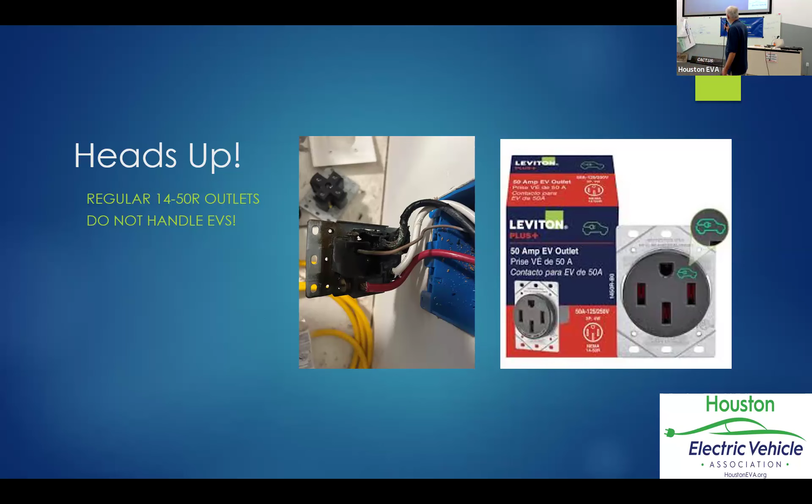Yeah, for folks with the chargers in the garage.

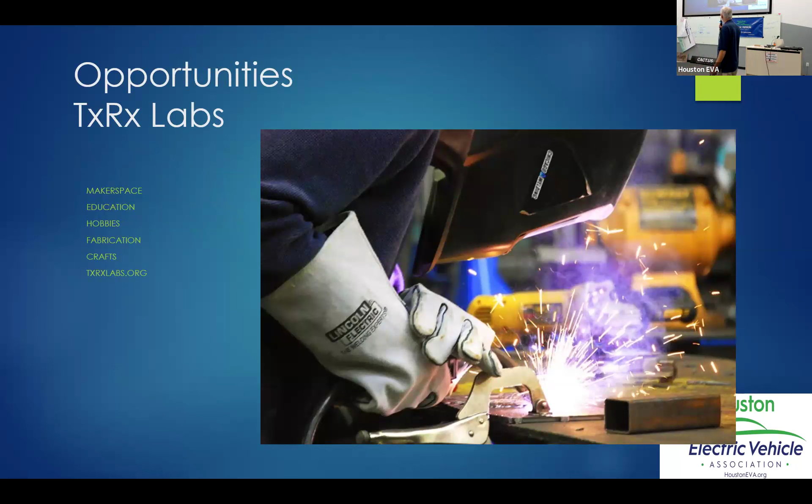TXRX opportunities here - you can always get a tour, which is really nice, to understand what's going on here in the building. We appreciate them letting us have free use of this space once a month.

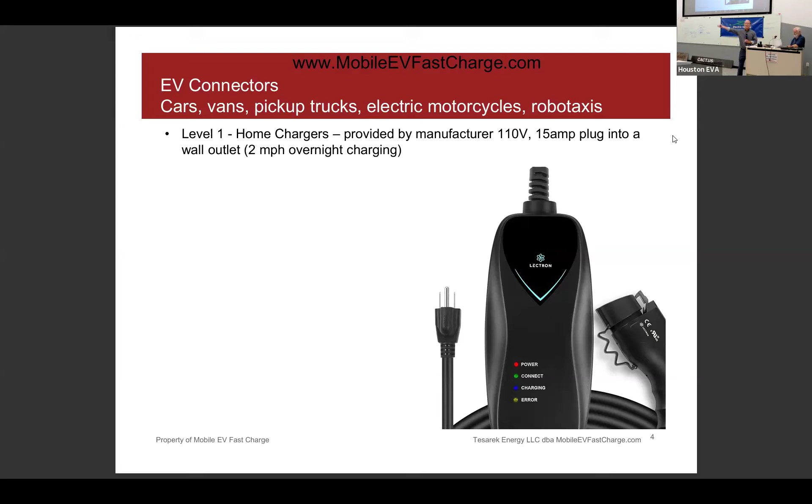What I am finding is people are renting EVs from rental companies, and they're not providing this level 1 charging. So people don't know what to do, which provides business for the company. But it's unfortunate that rental companies aren't including this in their equipment, because it could at least get you enough charge to get to a fixed charger.

The level 2 charger is generally a J1772 connection, and it looks like that - it's got 5 little dots in it. It's about 8 kilowatts, 240 volts, 30 amps, charges at about 24 to 30 miles per hour. You hear companies like Blink, ChargePoint, that provide these on a commercial basis.

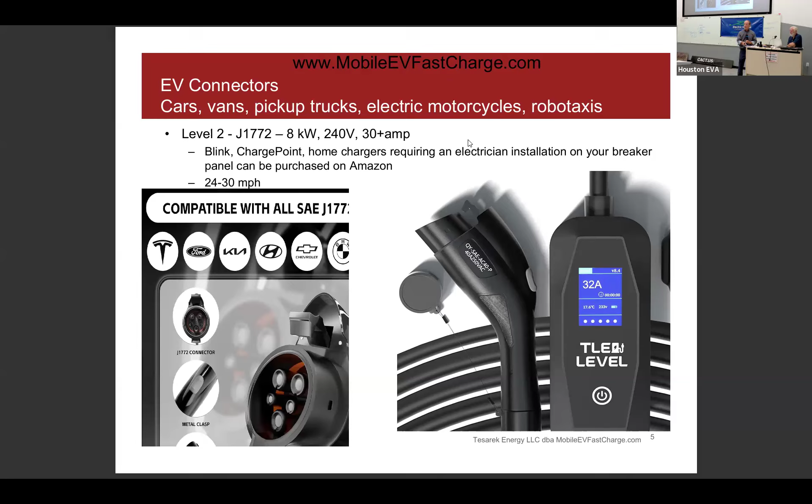And then, if you had an electrician install a 240 volt breaker, you can put a level 2 charger in your home. It does cost you, obviously, to get an electrician to come in and hook it up. But you can get level 2, and that will definitely charge your vehicle overnight if you had that capability.

Then the most interesting one for everybody is the level 3 chargers, and there's actually 3 of them. There's the CCS1 combo that refuels at 350 kilowatts, which is about 900 miles per hour, and the Tesla superchargers are about 250 kilowatts and about 750 miles per hour. But all of those statistics vary by the facility you're at - you can go to an EVgo station or a Shell recharge, and it's only charging at 80 kilowatts.

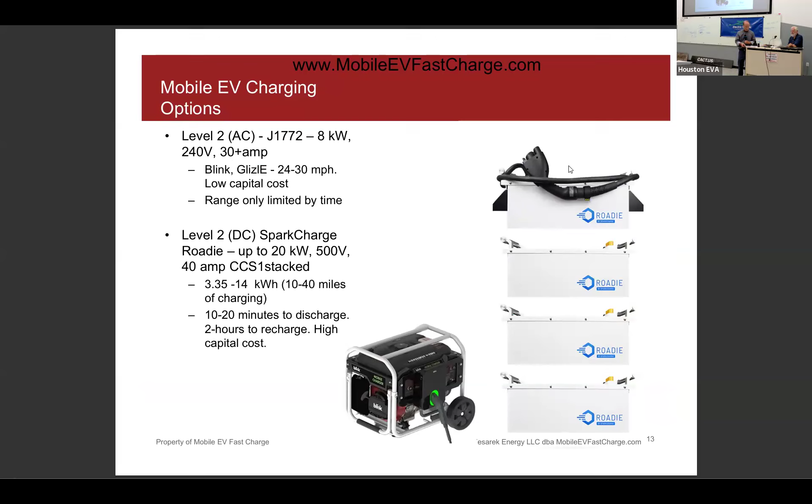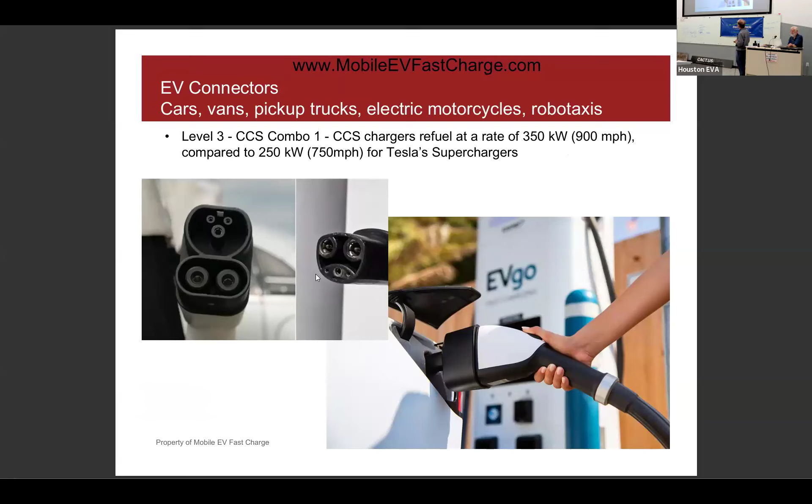Oops, wrong button. Must be the wrong button. Okay, all of those clicks just went there. Let's see if I can go backwards now. Can we go back? Can you help me on that one? They're up there at the end. Right there, go down 1. Just 1. Okay, it's not just me. Just 1 more below that one. Keep going, you're at the end. No, that's the end, that's like the second to last page. That's the last page, yeah. Keep going, up, yeah, up towards the beginning. I think you're going the wrong way, you're going towards the end. Let's go back towards the beginning. Page up. Oh, that's the page up. Wait, stop, okay, let me take it. Let me see if I can take it from there. I got it, okay, thank you.

So the next one, the level 3 that everybody hears about is the Tesla superchargers. As I said, it's 250 kilowatts, 750 miles per hour.

And until recently, Tesla was only able to use the NACS, or North American Charging Standard, plug, which is this one right here, to plug into a Tesla. And if a Tesla needed to use a J1772, they would need an adapter, and those come with the Teslas, and they plug in to a J1772.

But two things happened: Teslas allowed other makes of EVs to be able to use their Tesla network - that's relatively recent, just happened. And the other is that Teslas now can use a CCS connection - this is actually the adapter they have to use, it plugs into their car, and then they plug the CCS connection into this side. So there's now both sides of this connection for a Tesla.

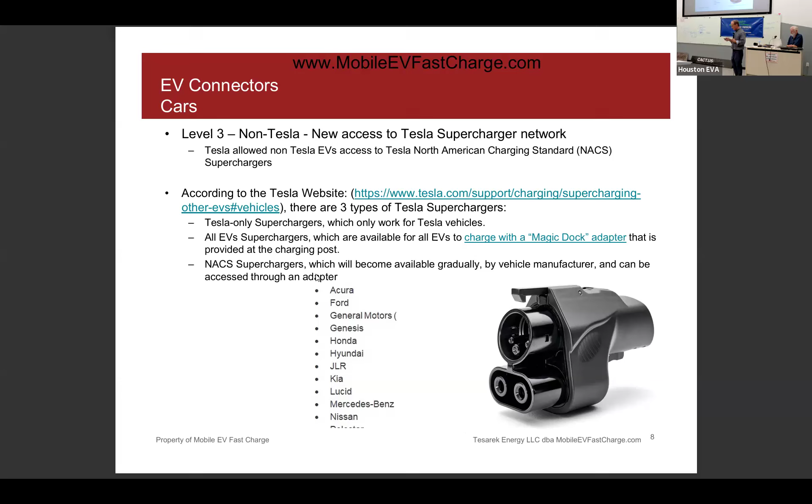Those are the connections, we can talk about that. If you have questions at the end, we can talk about how they charge. The other issue with that, did I do that?

So this will be better for all of you. You can't see me, you can just look at the slides.

So the other issue with electric vehicles, and most people don't understand, is there's actually two batteries in the car. There's the high voltage battery, and there's a 12-volt battery. Every car has a 12-volt battery, just like in your internal combustion engine, your ICE engine, they've got a 12-volt battery and it runs the onboard computer. It's needed to open the doors and the frunk, and to charge the vehicle. If the 12-volt battery isn't working, guess what? You're dead, because you can't charge the high voltage battery without the low voltage battery.

What I found is people that get to the end and they're at zero miles and they keep driving, the car actually runs on the 12-volt battery. It runs the entire electrical system to dead. And what happens then is the car's dead. You have to jump start the 12-volt battery in order to do the charging of the system.

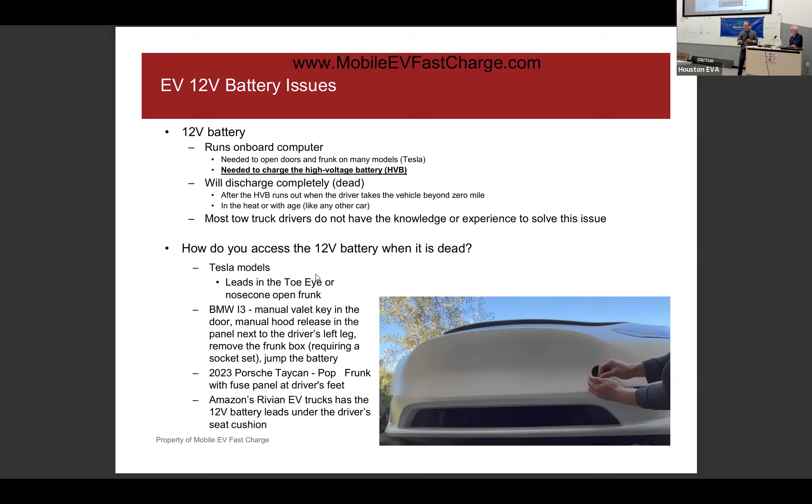My next topic is considerations when buying a used EV or renting one.

I think I mentioned this at the last meeting, that things are changing in the market. When we first started doing EVs, it was the technology, early adopters were buying EVs - people like us in the room, who like new things, can read the owner's manual, and so on. So guess what, we're 7, 8, 9, 10 years into the cycle. Your new technology isn't such new anymore.

Trade it in, right? Now, I don't know if you're aware that the EV market, the price of EVs has plummeted over the last couple of months. And so guess what, the least expensive used cars are EVs. And who buys the least expensive cars? The poorest people with the least knowledge.

Exactly, and they're coming off of lots. They're coming off of used car lots, not out of the Tesla factory or the Chevy dealership. They're coming off of Mo's used car lot, and Mo isn't going to tell anybody, he's just going to try to sell you the car and goodbye. They're not going to tell you how to use the car.

They're not going to provide the level 1 charger. A lot of times they don't charge it all the way up when they leave. I've had people that drove it off the lot and they ran out of charge on their first trip out of the lot.

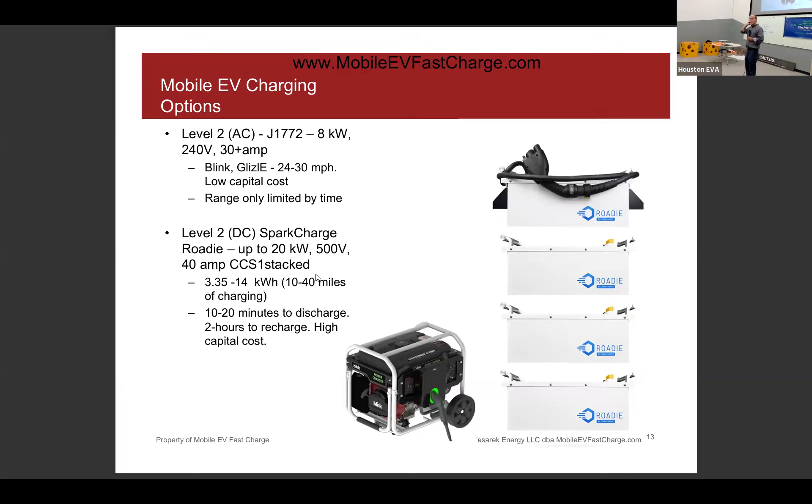So we're looking at that, but there are people using those. They're expensive now, and I don't understand how they would make money doing this. So that's why we haven't put that in the fleet yet.

And then you talk about the ask. We were talking about how long using a level 2 generator versus a true level 3 generator, where you've got lots of power and lots of time. You're talking about a trailer pulling that behind, and that trailer is probably 5,000 pounds and probably costs $100,000 to do that. So you're probably not going to see a lot of mobile level 3 chargers that can do a full Tesla supercharger-style charge — they have those for fleets. So if you had your own fleet, you could buy one of those and keep your fleet charged.

Questions? Anybody have any questions for me?

Someone asked about the 12-volt battery: have you ever replaced a lead acid battery with a lithium battery? I think most of the time they're using lithium batteries now — the Tesla one's a lithium battery. It's a form of lead acid. Yep, it's not lithium. I saw — was it a Bolt? I've seen lead batteries in there, but I don't know if you can replace a lithium battery with a lead acid one. So the data I heard from the new League City Tesla location is that yes, the newer vehicles are using lithium and they last a lot longer than lead acid. But due to the electronics of the car having been built for lead acid, you cannot take a car built for lead acid and put in lithium. And they're actually calling the lithium 16-volt batteries now.

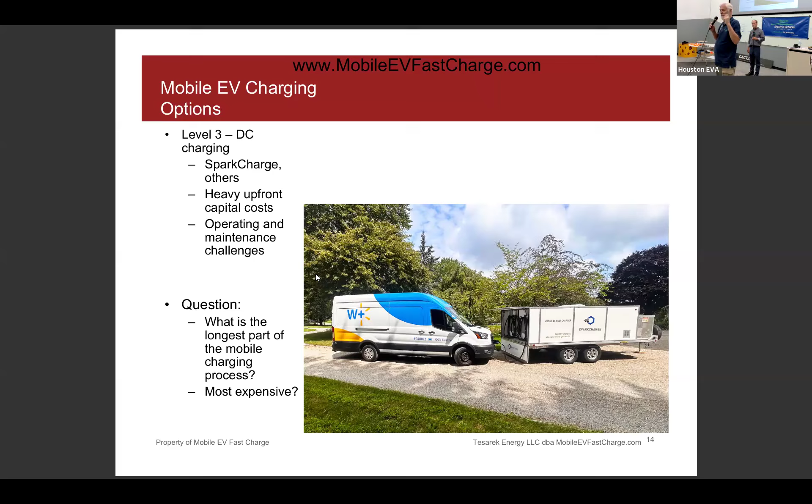The thing I have heard is folks with golf carts love putting lithium batteries in under the seat, in place of the original lead acid batteries. Because you're not generally dealing with complex electronics — most golf carts are just on and off — they zoom because you've reduced the weight of the vehicle substantially, and they go fast when you hit the accelerator in a golf cart with lithium.

Most of the roadside drivers for AAA are not employees of AAA, they're contractors. Why couldn't you make an arrangement like that, so they call on you when necessary? Good question — AAA is not providing the service currently. They made an announcement that they want 1 million EVs on the road in Texas, since it's AAA of Texas. I did the math, and it's going to be 3 or 4 years until we get that number of EVs on the road. I've tried to contact them — I think you gave me some information about a AAA person — but they're providing mobile EV charging in about 22 markets right now, nothing in Texas.

You're here — who needs AAA? Well, yeah, but it would be another source, to refer them to you.

Right, it could be, but the roadside drivers don't know how to deal with 12-volt batteries. They don't know how to deal with a lot of issues, like if your car's dead — they need the car to go in neutral to get it onto the flatbed, and they can't do it. So they just can't.

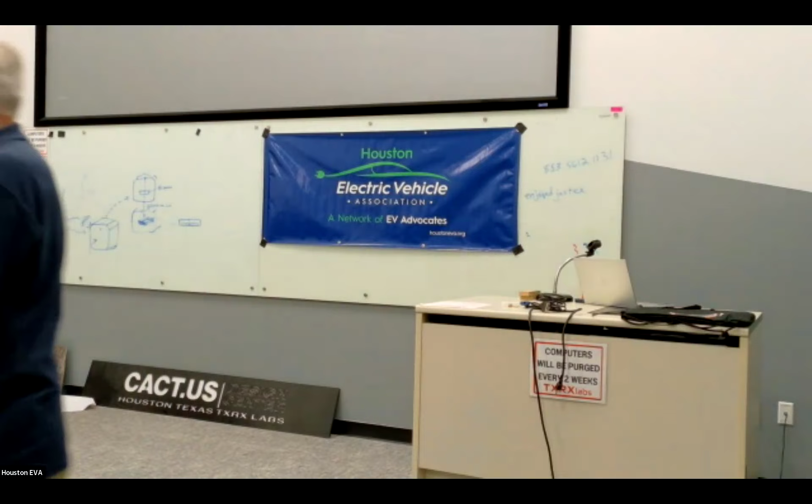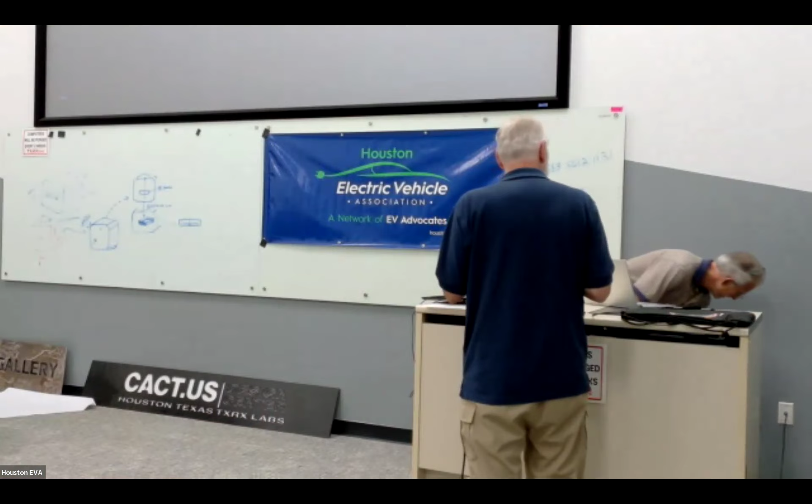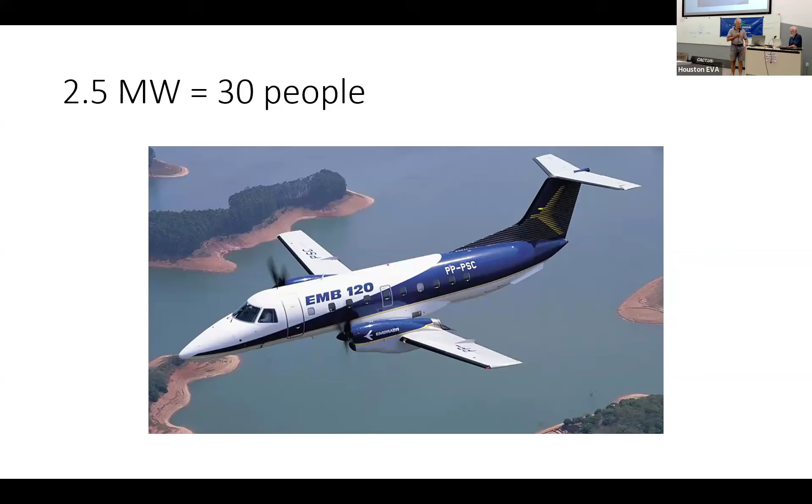It says 2 megawatts on this slide, but they're up to 2.5 megawatts, 2,500,000 watts. What does 2,500,000 watts get you? Well, if you put 2,500,000 watt gas turbine engines driving a couple of propellers behind a gearbox, you get to carry 30 people pretty fast, 300 miles an hour. This is the Embraer EMB 120. I have about 4,000 hours in that airplane. Anyways, brings me back.

All right, speed. How fast can we go? Speed is a function of engine, motor, power. You notice how I say engine and motor, because as most of you, if not all of you know, engines are internal combustion machines and motors are electric machines.

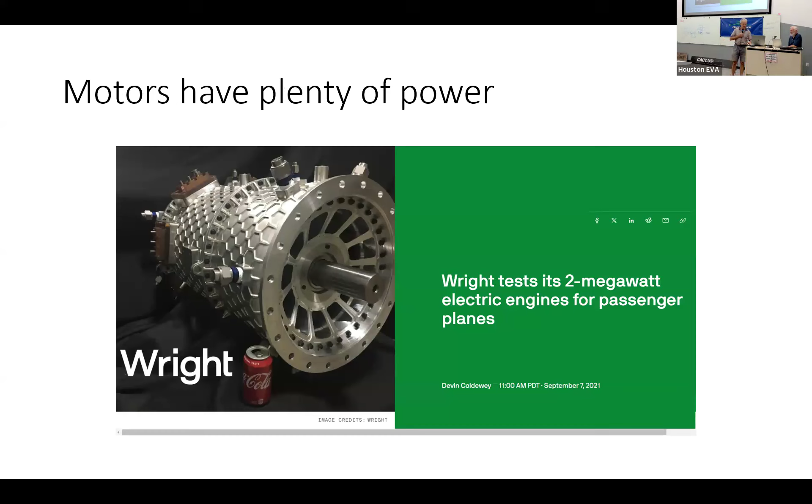Although, look at these people. I was at Oshkosh at the electric aircraft innovation symposium, and they're calling them electric engines. Why? Because I think all the marketing folks are thinking it's going to be easier to sell people on an electric airplane if they call it an engine.

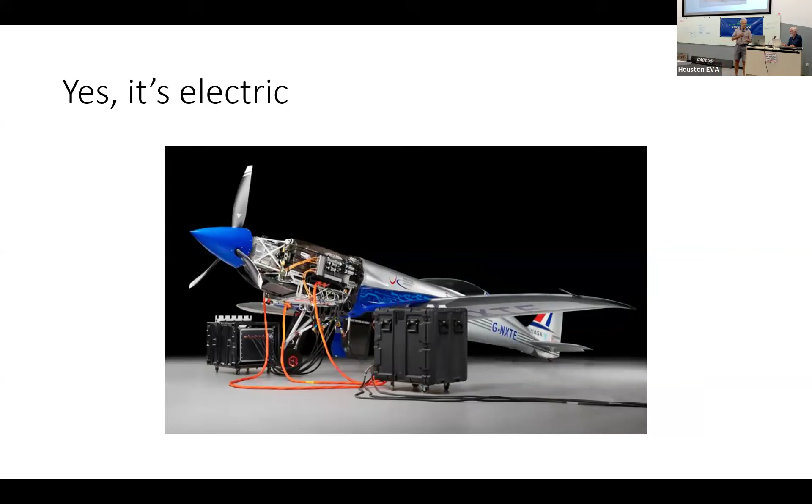It's a consortium. You know, the British, they know how to go fast, and they love making machines go fast. So the Brits get together, Rolls-Royce, Yasa Motors, they built their own battery, and they made that thing, and it's fast. It's real fast. How fast, you ask? It's faster than the wind blows.

Hurricanes and tornadoes blow about 230 miles an hour. This thing does 345 miles per hour. As the Europeans say, it goes 555.9 kilometers per hour, because that's a bigger number. It makes it sound faster. 555, 345 miles per hour. World record holder for electric powered aircraft, right there.

It's hanging in the London Science Museum. And it should be flying, because they're about to have an air race here. The Pulitzer Trophy is about to be run in October, and they should be flying that thing.

It would win. All right, so payload. So we got speed, we got payload. How many people, cargo, and fuel you can carry in an airplane? How many people know what that is? Spruce Goose. I like this crowd. Spruce Goose, designed to carry a lot of people and a lot of weight. The Hughes H4 Hercules, Spruce Goose.

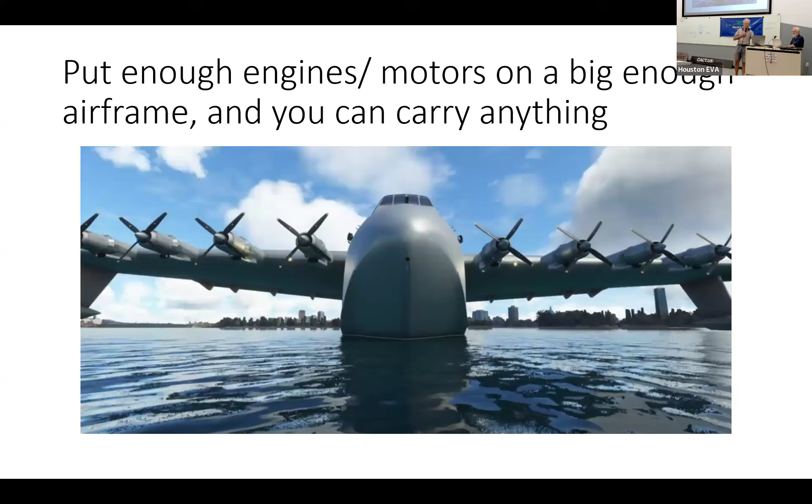400,000 pounds maximum takeoff weight. See, we do it too. The Europeans say 181,000 kilograms. We say 400,000 pounds, sounds bigger, but I digress. So we have enough power and we have enough size. My little thing was put enough engines, motors on a big enough airframe, and you can carry anything. So we got power, we can put a bunch of power on it. We can make big stuff.

The challenge of electric flight is energy density, usable energy density. Jet A, kerosene, that's what they put in that 737, 777, mine. Put a lot of, 55,000 gallons of Jet A in the 777. It contains 5,500 watt hours per pound. Lithium class batteries used in aviation, 100 watt hours per pound.

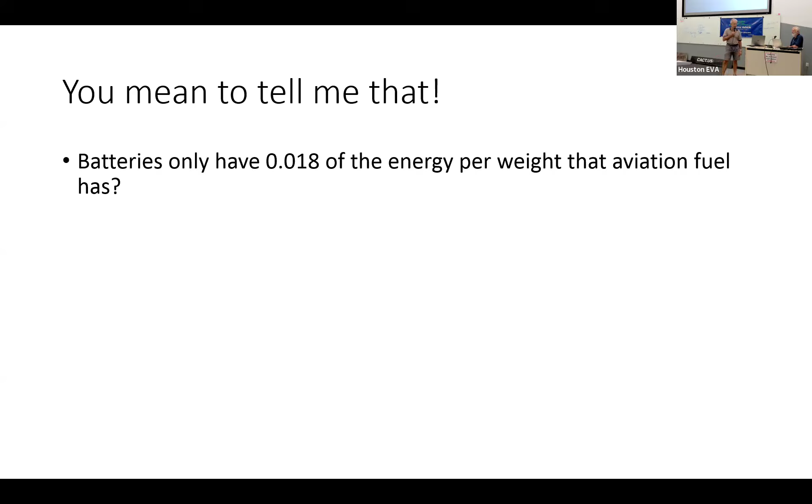You know what I'm saying? Yeah. You mean to this crowd, you guys are like quiet, because like this isn't the end of the slideshow, guys. I'm just kind of doing the theatrical thing. So yeah, you mean to tell me that batteries only have 0.018, or 1.8% of the energy that aviation gas has? Yeah.

But there is hope. Actually, let me move this thing because I can't see what my last part of my punchline is. It's not that bad. Always hope there is, because man is innovative. And we come up, when there's a will, there's a way. All right, we're not ready to carry hundreds of people across the Atlantic or Pacific Oceans at Mach 0.9, 90% the speed of sound. But we are ready to meet the needs of several missions electrically.

One way you know we're ready as a human race is you follow the money. Over 100 companies, including major aircraft manufacturing companies and some really exciting startups, are spending billions in invested capital towards electric flight.

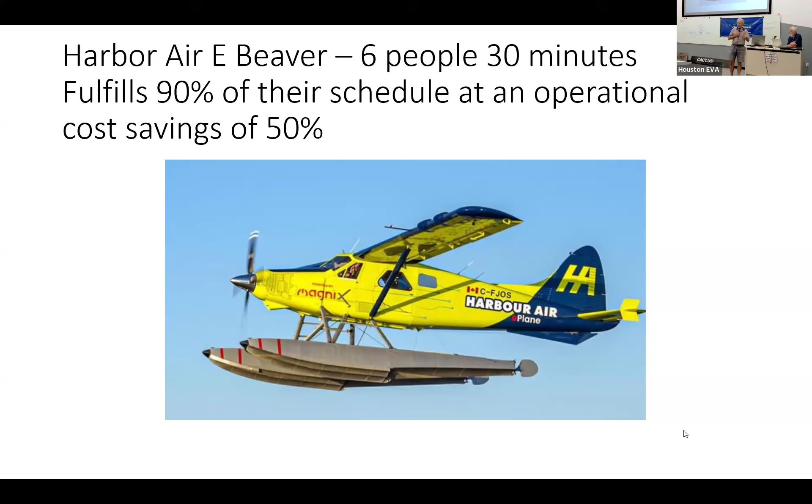Their cost savings is going to be 50% at least, and they'll be able to do 90% of their routes, because they're just flying from Vancouver to this little island, and Vancouver to that little island, up this little sound and down that little sound. Deirdre and I rode on a Twin Otter that's theirs, but it has turboprop engines. But float planes are cool - if you ever get a chance to fly in a float plane, that's kind of neat.

But the smart thing about them is that Textron and a lot of these companies, these conglomerates, they're keeping the brand. They're not going in and trying to reinvent the wheel, because a lot of the success that's been going on is the people that have that brand. So they've kept Pipistrel, and they have this little trainer. This is the first aircraft to be certificated in the United States as a light sport aircraft.

They just changed the rules. The FAA just changed the rules, and just now they introduced this thing called Mosaic. They've been working on it for 8 years. When they wrote the rule for light sport - which is most of the trainers - they said a light sport aircraft must be powered by a single reciprocating engine.

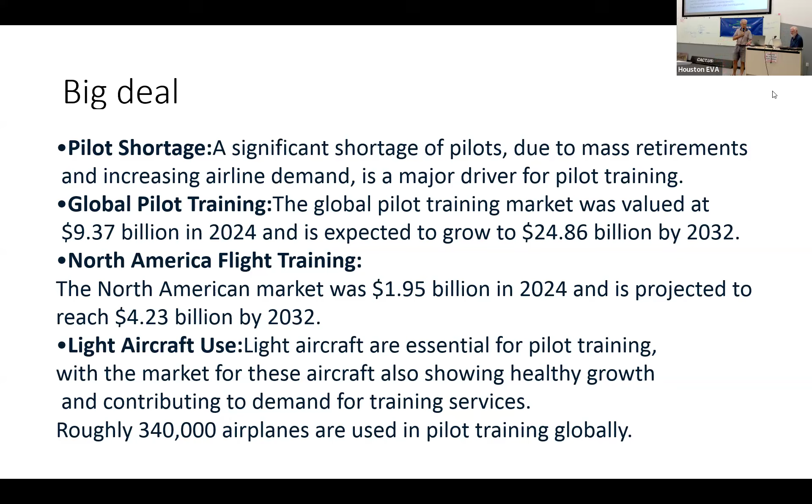All right, mass retirements. So I just wanted to tell you, this market is 9.37 billion in '24, expected to grow to 24 billion by '32. North America, a couple of billion. Light aircraft used, 340,000 airplanes are used to train pilots globally. 340,000, it's pretty good. And these airplanes are $500,000. So that's real good.

All right, what do you need to get your pilot license? Well, you got to get a few of them. You got to get your private pilot. That allows you to fly around by yourself. You can carry people. You can do it at day, at night. Then if you want to fly in the clouds, you got to get an instrument rating. And then if you want to get paid to fly airplanes, you got to get a commercial pilot certificate, they're called license. And then one of the ways you get paid is teaching people to fly, and that's a certificated flight instructor. And then you can teach people how to fly in the clouds. And by the way, that's all single engine stuff. There's multi-engine rating, and there's multi-engine instructor rating. And then when you get to big aircraft, you need to have an airline transport pilot certificate.

And then you turn 65 and the FAA says you no longer get to exercise the privileges of that airline transport pilot certificate, because your medical now goes from a class 1 to a class 2, just because you turned 65. I got a buddy that just retired from Southwest Airlines. He flies everything: helicopters, gliders, balloons, hot air balloons, amphibians. He's a great pilot, just enjoys aviation. He's divorced, doesn't have any kids, so he's got airplanes. He was flying this Grumman Goose, this beautiful amphibious airplane, the old timey one with the big radial engines like they had in the '30s. He was flying that and posting some stuff on it, and one of the guys in the group says, 'Riz, is there anything you don't know how to fly?' And he said, 'According to the FAA, I no longer know how to fly the 737.' He was flying the 737 for Southwest.

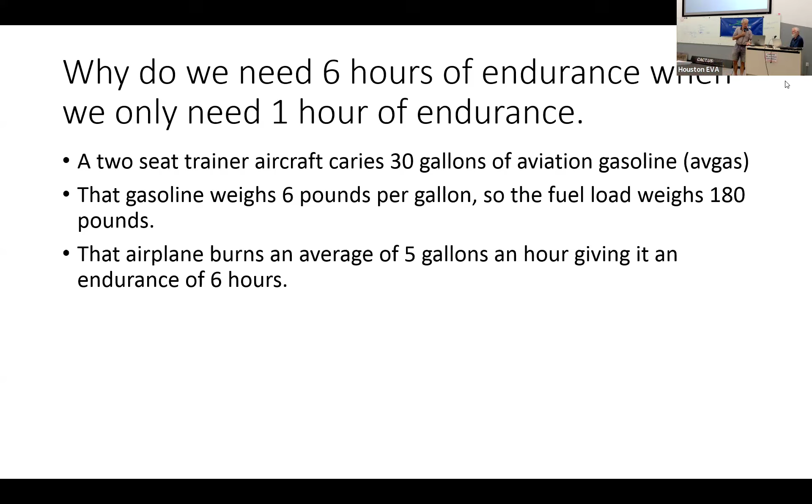This is like you're here and the other person is right here and the window is right here. You think you want to sit in that thing for 6 hours? I'll tell you, the only reason you want to sit in that thing for 6 hours is because you're going to be an airline pilot someday. And if that's what you got to do, that's what you got to do. But some people are crazy about airplanes, so they do. They just fly long distances and break records, but you don't have to get your license. Remember that guy?

Even at 1.8% the energy density of aviation fuel, batteries today can provide enough stored energy to allow a two-seat airplane to fly 1 hour. More, actually.

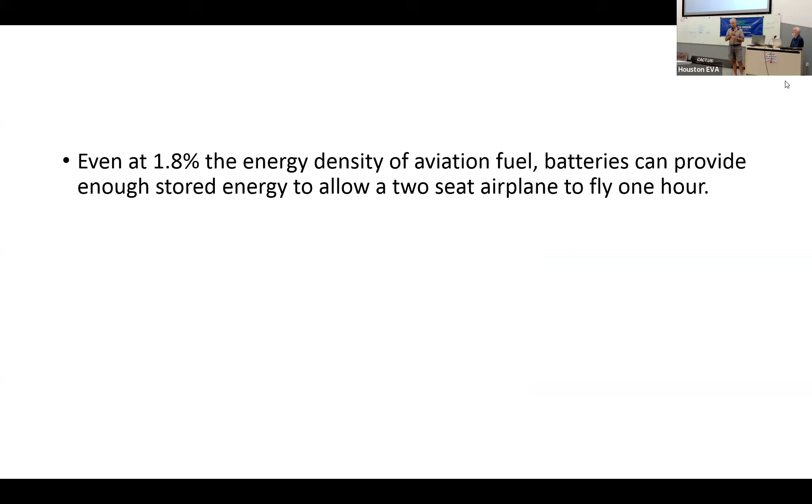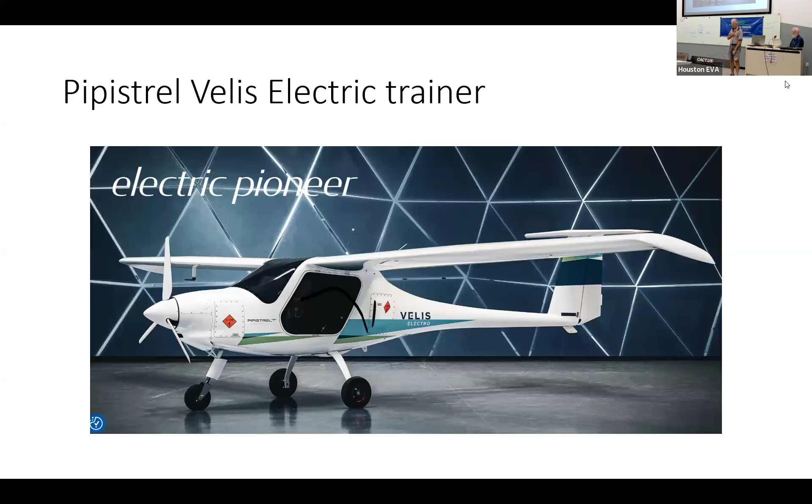Electric airplanes already fly 1 hour. That one does? Well, it's not certificated yet. But that one's going to go 2 hours at normal cruise. It's going to have about an 80 kilowatt hour battery, I think. It's going to be able to go 2 hours normal cruise plus reserves. That one, 45 minutes plus a half an hour of reserves. This one, it's going to go 1 hour plus reserves.

But all the manuals are being written the way all airplane manuals are. So they're being written at... well, don't get ahead of myself. This is how electric airplanes are going to do it. This is how they do it.

A long cross country is the biggest challenge. You got to go 300 miles. You got to stop at least 3 airports. One of the airports has to be at least 250 miles away from the first airport. But the key is the airports only have to be 50 miles away from each other. To log cross-country time, you only have to go 50 nautical miles.

If you take one of these airplanes and you cruise it at... and I'll get into best cruising endurance power settings, the airplane will go about 70 nautical miles per hour.

So don't fly an electric airplane the way you fly a gas airplane. Remember the Leaf? We didn't drive the Leaf the way we drove the gas car, because the Leaf, even though they told you it went 80 miles, when you added a little bit of age and you added a little bit of cold and you added a little bit of hills, it didn't go 80 miles. It went 70 miles. In the cold winter, it went 50 miles.

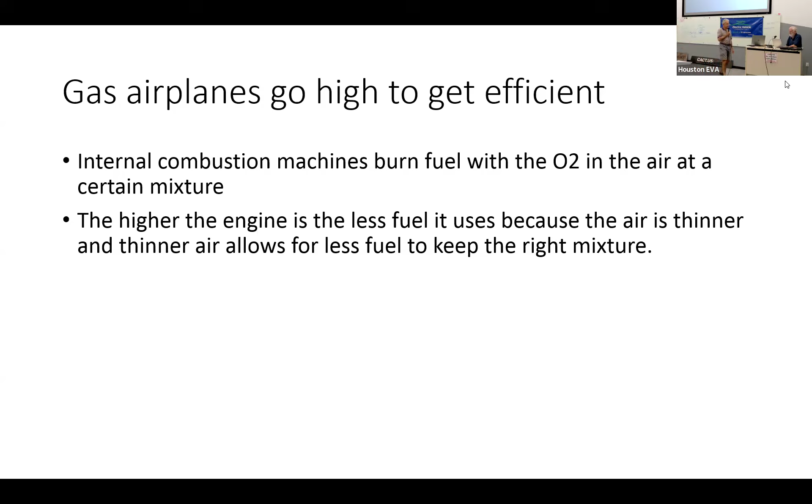So anyways, the higher you go, the less dense the air is. And since there's less air molecules, you get to mix them with less fuel. Also, another little advantage of going high is that because the air molecules are farther apart, the airplane gets to go faster to go over the same amount of air molecules. Electric motors, they don't use air and they don't care how high you go. Gas airplanes are flown high in cruise so you can get your fuel burns down.

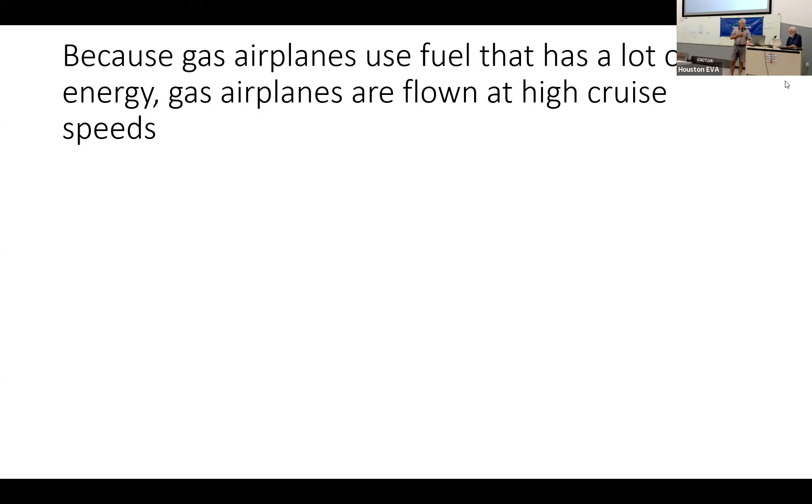So how do we get them to do a long cross country? Low and slow - that's right, low and slow.

The Pipistrel, that airplane I'm going to get, has a 48 kilowatt hour usable battery, and if you set climb power, the thing has a 90 kilowatt motor. It can do 95 or 105 kilowatts for takeoff, and max continuous is 90. If you do the math and fly at 90 kilowatts, your airplane will go 120 knots, but only for about 30 minutes. It'll run out of juice.

So if you actually climb up - and I've got another slide here - the secret is you don't have to climb way high. You really have to get up into the 20s to get thinner air, so you'd go long distances, 1,000-mile distances, in fast airplanes. For little training flights, you just climb up till you get above the terrain. The rules are 2,000 feet above the terrain, get up there, and then power back - it depends.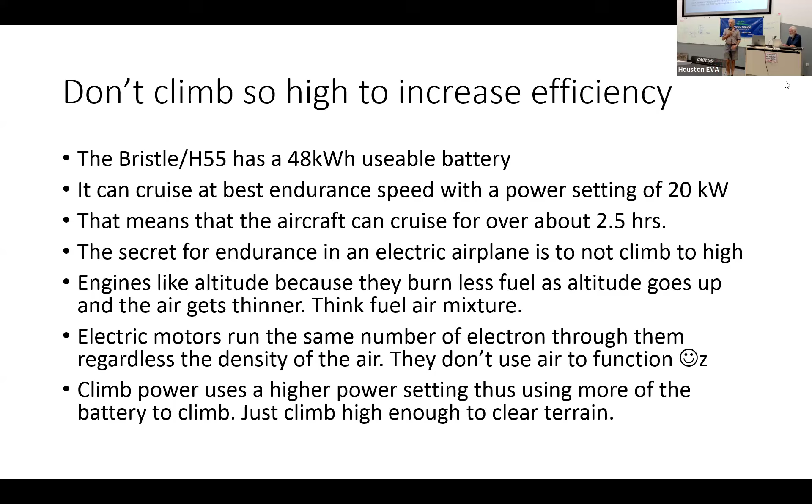So don't go fast. You're building time anyways. Like he said, you have to have so much total time. To be an airline transport pilot, you have to have 1,500 hours. So you've got to get your private pilot license, then you need 150 hours to get your instrument rating, then 250 hours to get your commercial, and then you build the rest of that time.

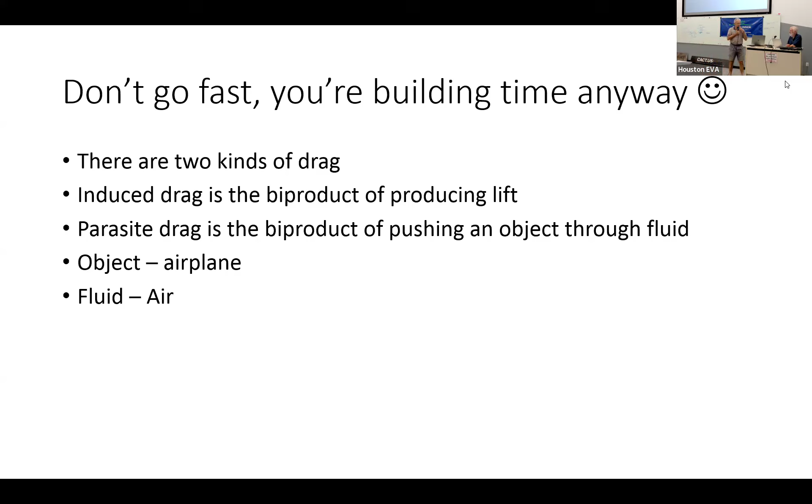So okay, you can build it at 120 miles an hour, or you can build it at 70 miles an hour - it doesn't matter, because your logbook doesn't say how many miles you flew, it says how many hours you flew. This is what happens with airplanes - it happens with your car too. There's this thing called induced drag and parasite drag.

Induced drag is the drag created by taking this mass and sustaining it with lift. Lift works like this: you've got this thing at an angle, and the air comes and goes down - and the air weighs something, we know because we can feel it. We displace that air down, and that equal and opposite force is us lifting the airplane. That's induced drag. Parasite drag is the faster you go, the more air resistance you feel.

Anybody here ride a bicycle? You get to a certain point where your legs just cannot overcome parasite drag, because the curve for parasite drag is not linear, it's exponential. I used to know this - two times the square, something like that. Somebody help me.

So why do you want to go where you have to use a lot of power to overcome drag when you're trying to build time anyways? Why not fly the airplane down here in the - let's see, can y'all see my arrow? Why not fly it where it requires the least amount of power?

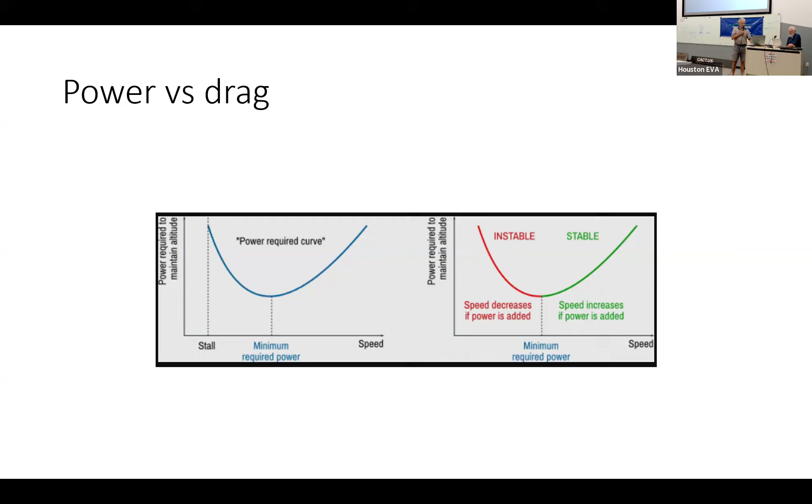So stay slow, stay low, go slow - and that's how you do it. And that's how you do all the licenses. And then I wanted to show this video.

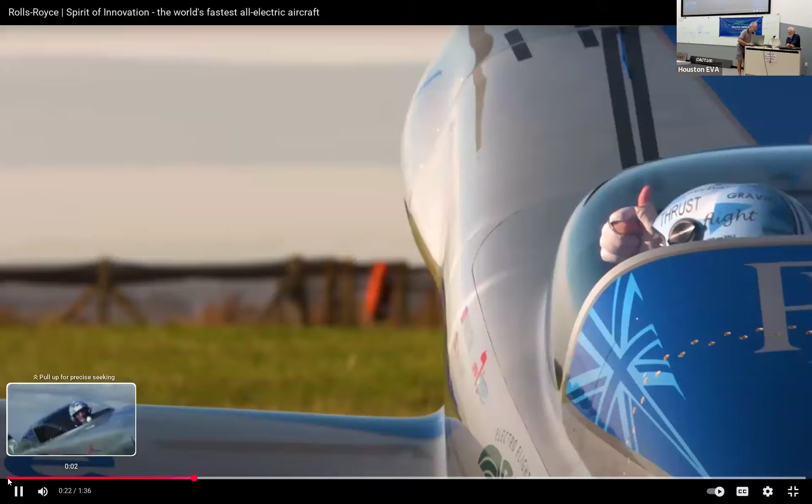It's a great aeroplane to go and break records with, but also to improve the future and the next steps for electric aviation.

Key thing about breaking the record is about demonstrating how fast this technology is going, and therefore how soon it's going to be in our lives. This technology offers us the opportunity to start traveling in a really net zero way.

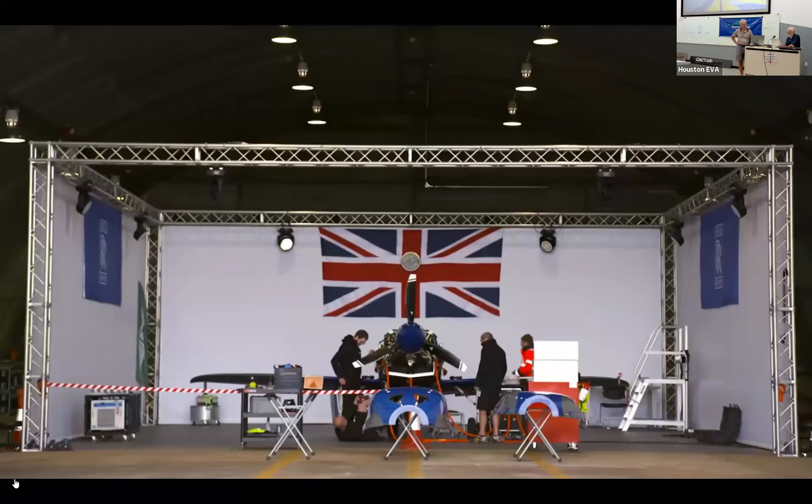We've broken a record that already existed, but crucially, we've broken it by a phenomenal amount. I think it's clearly demonstrating that we're getting into the third age of aviation. Electric aviation is absolutely and utterly here to stay.